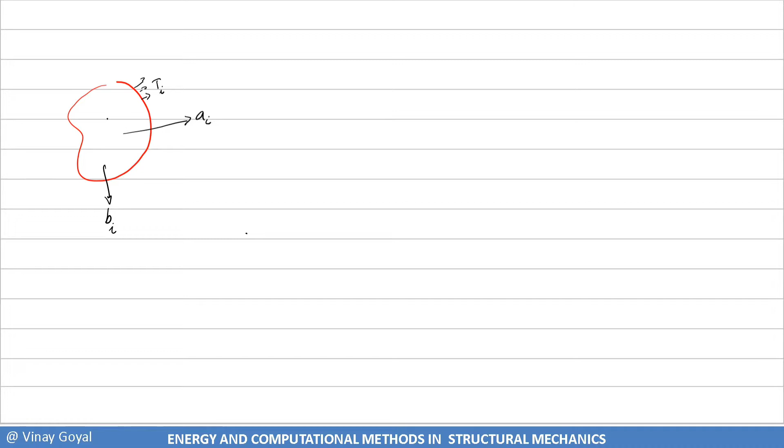But the next question is, what is next? That's where we want to go. So let's consider a body of material B. This body of material B is subject to body force Bi, traction loads Ti, and acceleration Ai, and it is reacted by the stresses at this point, which are sigma ij.

What we learned is that the system is in equilibrium on a volume element in the undeformed body, even though the stresses in the undeformed body vanish for this natural state. So I could state then that sigma ij, comma j, plus bi equals rho ai, and if there's no acceleration, this is equal to 0, in the volume V.

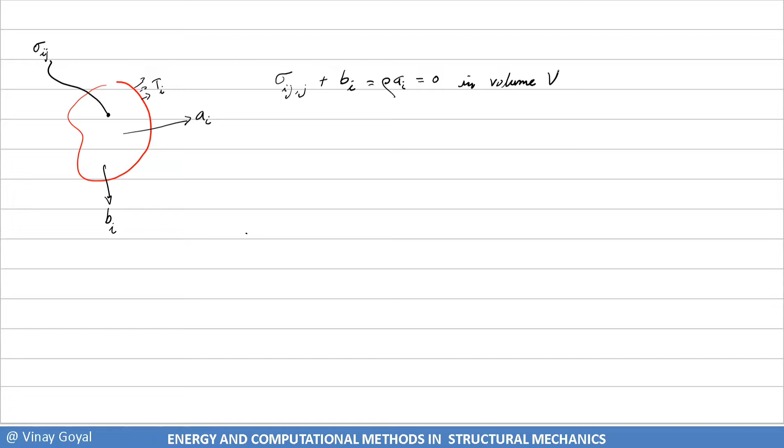Furthermore, what we want to do next is consider this body of material, and I'm going to consider an infinitesimal change in the deflection of the particle, assuming it changed an amount delta. In other words, say I have a body of material that's fixed here, I'm going to state that the body is going to change shape to a different shape.

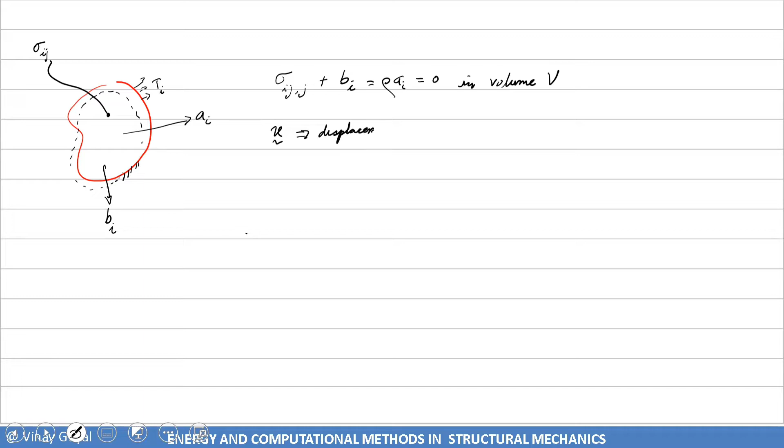I'm going to say that every point in the body moved an amount. If we call Ui the U vector deflections, displacements at every point, I'm going to state that every point is getting moved now. Like this point could have moved to this point. So every point in the body is moving some amount, and we're going to consider that change to be infinitesimal and virtual. It's a fake change.

So we'll consider then an infinitesimal change in the displacement of the particle originally at coordinates xj. In other words, this particle here moved to this point here. So P moved to P prime. That's what I'm looking at here.

We're going to say that infinitesimal change in displacement, which is virtual, that change in deflection, we'll denote as del Ui at xj, at that location in place. So we're calling this function then a virtual displacement function.

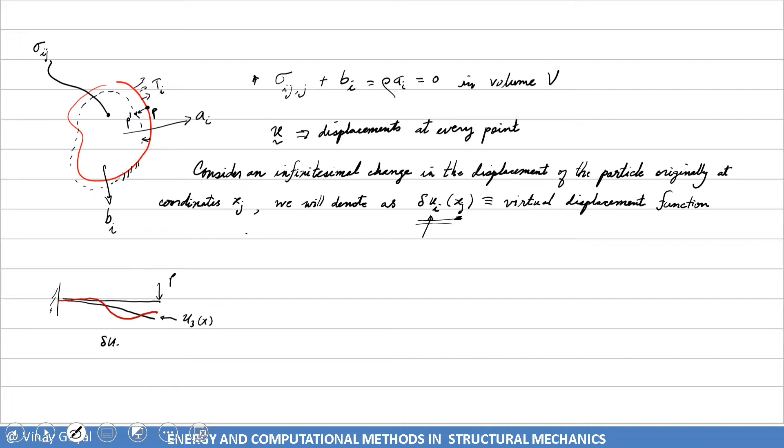So that's a real solution. And if I were to consider a virtual solution to the problem, so I'm looking at this instead now, remember what this means: del U3 of X1 -- if this is X1 this way -- corresponds to the change in height, deflection, between the virtual solution, shown in red, U3 tilde of X1. So that's the change in height, keeping X1 fixed.

Very similar in a 3D body, we keep X fixed, but then U is being changed from the real solution to the virtual solution. And so then I can consider the actual virtual work done by this change in deflection, which is virtual.

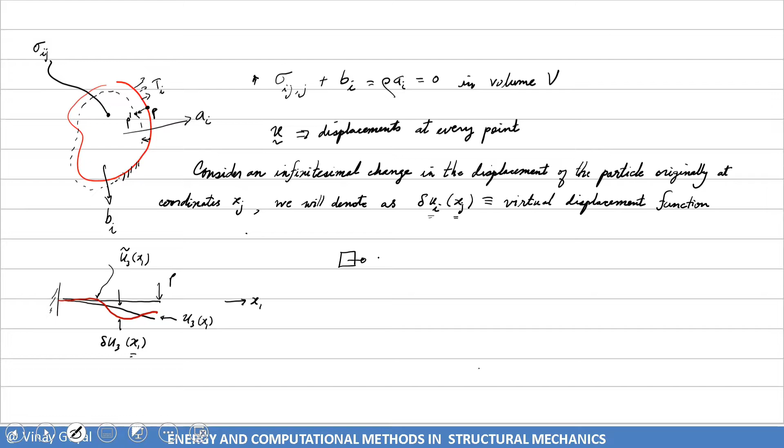So if you remember from physics, if I were to have a block of material and I moved it some amount by a force F, and it moved an amount D, the work done is F times D.

Very similarly here, what we're considering is the virtual work done, because the work is not real. If the change in displacements are virtual, then the virtual displacements cause a virtual work done. So the incremental work done

due to the forces acting on the body are given by del W. This is the triple integral over the volume, with the body force BI, that force moving through the virtual deflections, so I write del UI, del UI dV, because the body forces act over the volume.

Plus the double integral of the tractions which are acting on the surface. You can see tractions are acting on the surface, let's call that surface S. I'll call this Ti, whose normal is acting on a surface whose normal is N. And that's moving through del UI. That's how I get the

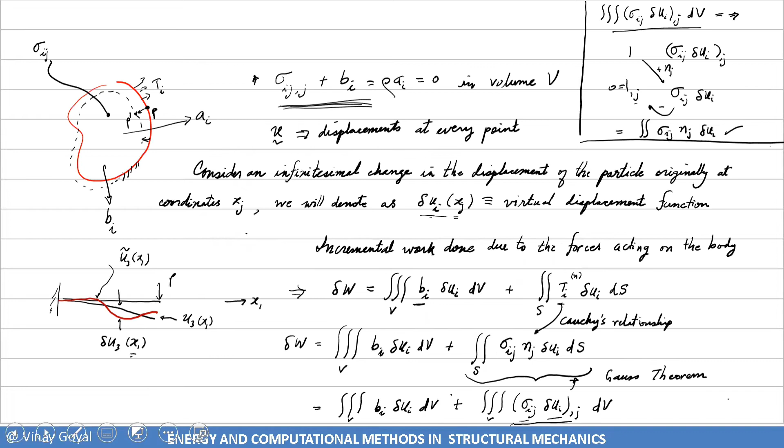The triple integral is sigma ij times del epsilon ij dv. And what this is telling us is something very powerful. We started with the external work done due to these fake changes in deflections, from the undeformed state to the deformed state.

And then we walked it through Cauchy's relationship to convert into a volume integral. Then we applied Gauss theorem. And after that, we end up finding that when we relate this external virtual work done, it's also related somehow to the internal stresses, which are reacting to external loads, moving now through the virtual strains. So these are clearly energetically conjugate.

They're conjugate to each other, energetically conjugate, and they belong to each other, which means there must be a way to relate sigma ij to epsilon ij. And so that is the subject of today's lecture, to relate sigma ij to epsilon ij, because they must be related, and they're related through the constitutive law, which is a material property you can determine through material measurements.

So let's examine the virtual work. The work done by these virtual displacements is virtual, it's not real. And what we demonstrated in this particular derivation is that the stress, the Cauchy stress, this right here is called the Cauchy stress, is energetically conjugate and is married to this infinitesimal strain.

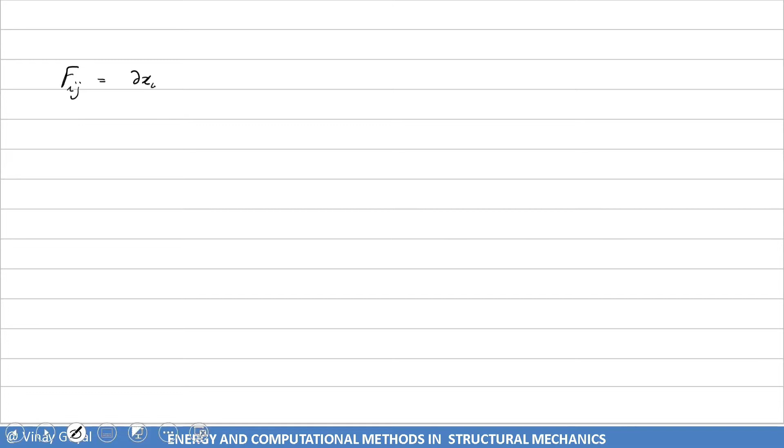Remember that the deformation gradient is the derivative of the coordinates of the deformed body with respect to the undeformed body. So that's the first step. I want to get there doing this.

The second step is that this is equal, if you recall, xi is ui plus xi - so the displacement plus the coordinate xi. Then partial against xj. What I'm going to do now is take that derivative: partial of ui with respect to xj plus del ij. And so that's a good start.

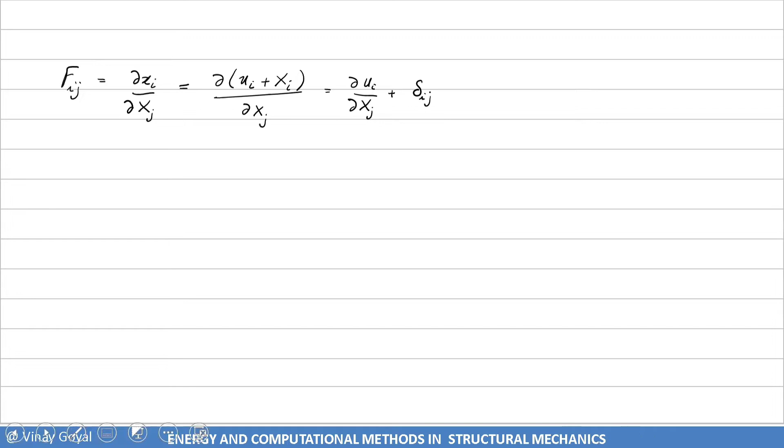And we've already made progress. So the next step, notice what I want to do - I want to show you where we were. This is what we had earlier, right here. And what I want to do is get to this state: I want to convert this del epsilon ij to the Green-Lagrange strain tensor, because that was defined on the undeformed body of material.

So to get there, very slowly, I need to start looking at the procedure. To do that, I need to take the first variation of Fij, and when I do that I have to take the derivative of Fij with respect to - and I'm going to change the variables, so instead of i and j, I'll use the derivative with respect to ua,b, because when I look at Fij, it only depends on derivatives.

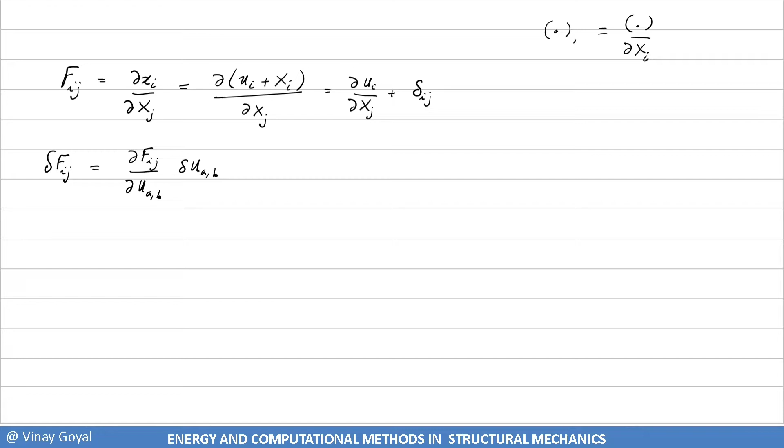So then I'll take that derivative instead, del u a,b. Here I'm using comma - that derivative is taken with respect to the undeformed configuration. I'm changing the notation a little bit because it will be easier for us moving forward. So continuing on, x here is the undeformed configuration, and the small x is the deformed configuration.

Very good, so we're getting there. Now when I look at that derivative, we only have this derivative with respect to this one right here, and that's all that is. I apologize for that - this derivative here, we want to take this derivative here. So all we have to do then is proceed forward with that derivation.

So then we have del AI, and then we have del JB. You can see that because this right here, if I define this quantity, then I can call this UI,comma J. Now earlier I was using UI,comma J with respect to the deformed configuration, so I want you to be careful here - I've changed the convention a little bit just so we can move forward a little bit quicker. So the derivative of this is going to give you that clearly, and then you have del U, okay, U,A,comma,B. So that's good progress right there.

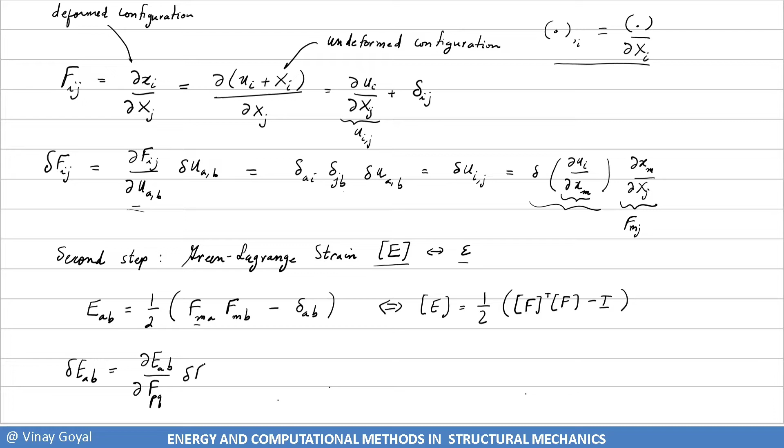So I want to basically use different variables that have not been used: P, Q. And so there's a variation - this is times the variation of FPQ. So I'm going to expand on that. My goal again is to try to figure out a way of relating these two quantities here.

The green Lagrange strain and infinitesimal strains. Infinitesimal strains are defined on the deformed configuration. The green Lagrange strain is defined in the undeformed configuration. When you're modeling biological tissues or large deformations like polymer behaviors, you definitely want to be working with large deformations. That's typically what is done.

And you may have seen in some of the problems that in the latest problem that we solved, it was the heart, and we're trying to model the heart with large deformations. And so that's why I had you guys look at green Lagrange strain, not the infinitesimal strain, because you need to really understand these large deformations really well to be able to model bodies of materials that exhibit large deformation, such as tissue behavior and membranes.

So here I have to expand on this, just reminding you of the motivation, because some of you may not understand why we're doing it. And so I really want you to pay attention to what's going on here.

So this 1/2 times the derivative of this quantity with respect to FPQ, that should be relatively easy. You've seen it done. We have to use the Kronecker delta, so you get del MP, del AQ, and all I've done is taken this derivative right there. So we have times FMB, okay? And then we have the product rule, which is what we're using, plus FMA, Kronecker delta MP, and Kronecker delta again, BQ.

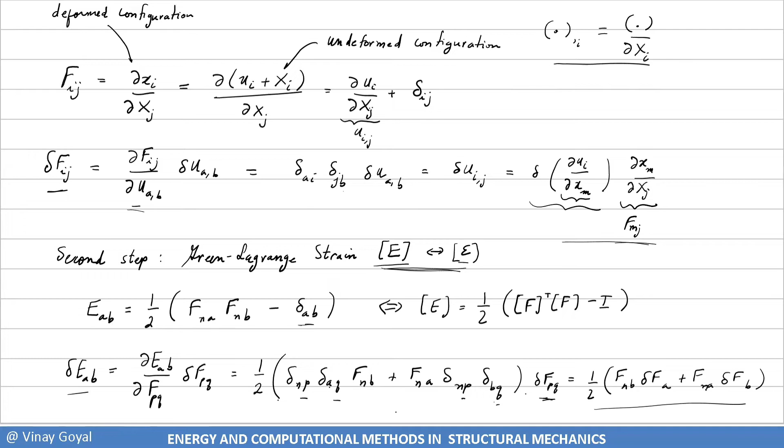In the next page, all these are N's, and N is repeated, so we want to be careful. Here again I'll use N just so we're careful, and since I already used M over here, that's a repeated index.

So the del of NA, what I'm going to do is use this formula here to substitute it: del FNA. So let's start with that. So that's F, substituting this for that, and then in that parenthesis what we want to put is that second index there, A.

And this index is repeated, so let's use that M again, that's fine, we can use that. Del derivative of U, and then the I instead of I is N, with respect to small xm. So far so good.

So I've replaced this with this, and I changed indices to be consistent with the formula that I have, plus FNA. And now again substitute this for whatever I have. So that's F, and notice how again I have to use the index B here, and I can use M again, that's fine. And then del partial of U, but now is N again, with respect to XM.

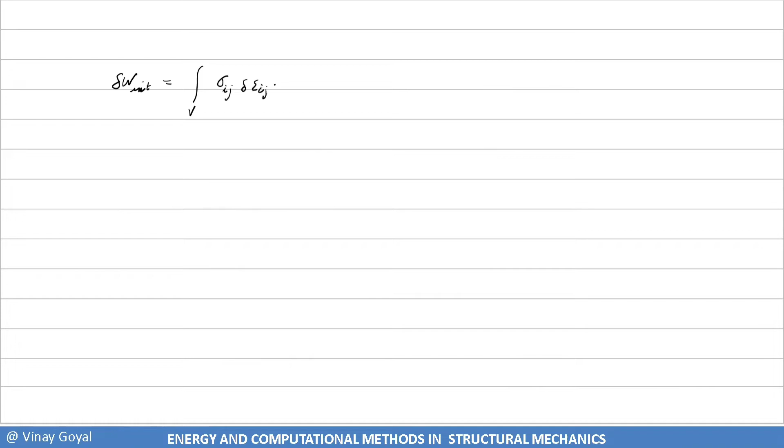So we'll go to the next page and bring everything together. The internal virtual work was shown to be the integral over the volume of sigma ij del epsilon ij dV. I want to write this on the undeformed configuration, so that's the integral over V. Now what I'm going to do is switch the variable so that I can match it with what I have on the previous page. I can use those indices directly. So this is the same as that, it doesn't change.

And then I'll substitute all the elements from the previous page. Sigma AB I'll leave alone, and then del epsilon AB I've already found fully. In fact, I should use MN, because that's what I used on the previous page, not AB. Let me do that. Now it's plug and play: I can plug in del epsilon MN from the previous page, F inverse MB, F inverse NA, and then del EAB. Now I have the deformation gradient, the determinant of that, which is J, and dV naught. Notice how the integral is now over the undeformed volume, which is very convenient. You can do the calculations there now.

So now I'm going to rearrange terms. I'll bring the J ahead and write it like this. Continuing, I can just rearrange all the terms: F inverse MB del EAB F inverse NA, and then dV naught. That is how I found the relationship from the deformed configuration to the undeformed configuration. And so now what I can do is figure out...

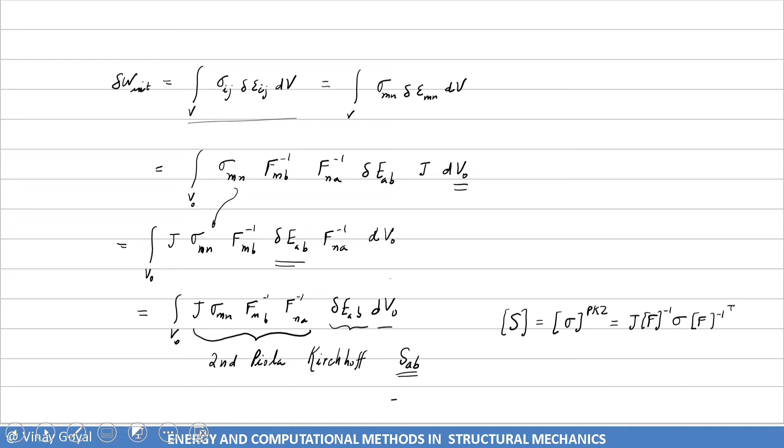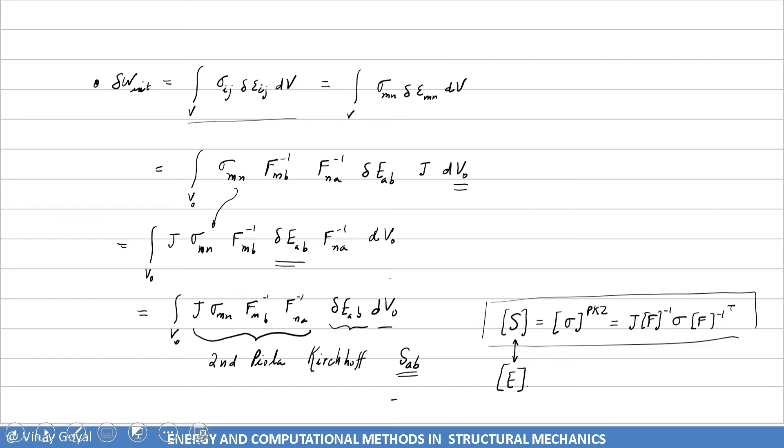This is the formula for second Piola-Kirchhoff stress, which is energetically conjugate to the Green-Lagrange strain. Both formulas are for finite deformation, but one is defined in the deformed configuration and the other in the undeformed configuration. Sometimes it's easier to do calculations in the undeformed configuration. The physical meaning of the second Piola-Kirchhoff stress isn't always clear, but it's convenient because it's symmetric.

The advantage of using the second Piola-Kirchhoff stress is that it's energetically conjugate to the Green-Lagrange strain, and it's parameterized by material coordinates only—derivatives are taken with respect to the undeformed configuration X. It can be interpreted as taking the force vector in the current configuration and relocating that corresponding vector in the undeformed configuration. This stress tensor is a kind of fictitious force divided by the corresponding area in the reference configuration, but it has value because it's symmetric and energetically conjugate. It's also simple to calculate: if I know F, I can do this calculation straightforwardly.

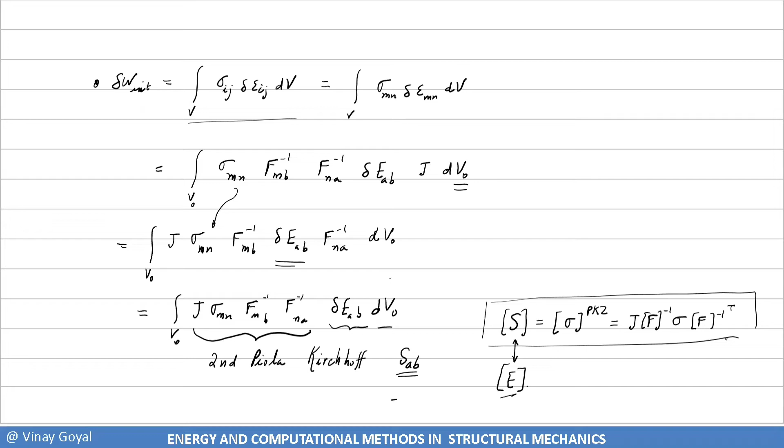With that said, we'll continue with the constitutive relationships. Today's lecture is really about constitutive law, and that long introduction was to demonstrate that stresses are related to strains, and that we should consider a way to figure that out.

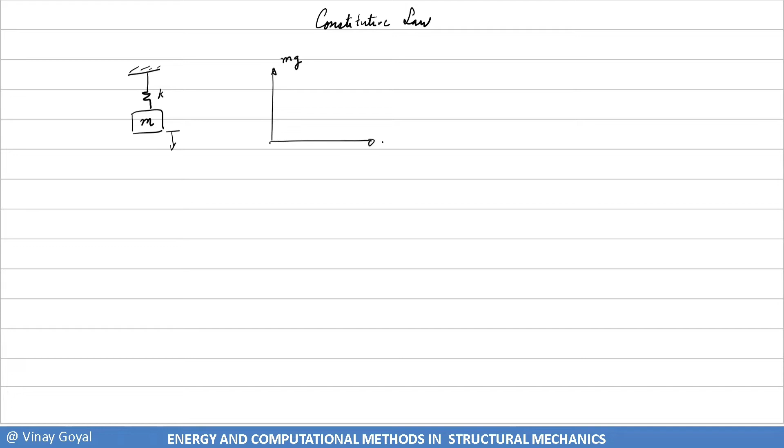If I went to the lab and had a spring and a mass M, that mass would cause the spring to stretch a certain amount. You can measure the weight and the deflection in the lab, and that gives you a stiffness. This stiffness provides resistance to deformation, and we know that if you change the mass in different ways, the deflection will change.

Hooke, in 1678, looked at the idea of testing multiple rods with different thicknesses, different diameters—so many different cross-sectional areas. It was found that for the same material, if I measure the deflection when a load P is applied at the end, that deflection depends upon the cross-sectional area. So if the cross-sectional area was A1 or A2, the deflection would also change.

It was also found that if the length of the rod was changed, the deflection also changes. So you get different final lengths, L1, L2, and different stiffnesses.

What was found is that if I normalize by taking P and dividing by area for the same rod and for different rods of the same material, then took the change in length delta—final length minus initial length divided by initial length—and tested multiple rods with different cross-sectional areas and multiple lengths, all the lines landed in one place with a common stiffness, a common slope, which they called the modulus.

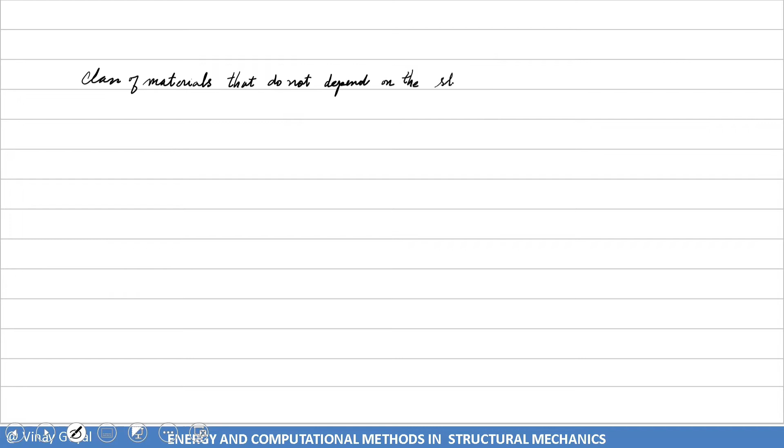Let's look at a class of materials that do not depend on the strain history. To tackle that, we'll say that in these cases, the body behaves elastically. In other words, I apply loading to the structure, and when I remove the loading, the body returns back to its original state—it's fully reversible, so it's fully elastic.

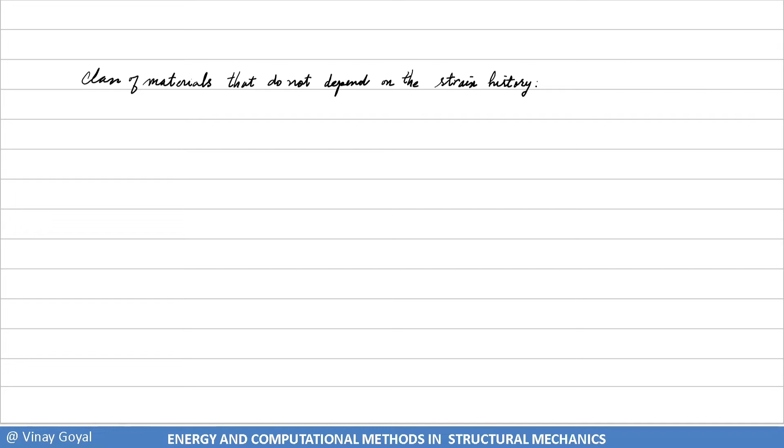In other words, if I had a little bar and I applied a load P, it will deform like this, that much, say.

But now I remove the load—this is undeformed, this is deformed—and now I remove the load, and it goes back to the original state. So remove the load, and it goes back to the original state.

We call this an elastic, reversible, elastic material, meaning it is reversible, okay?

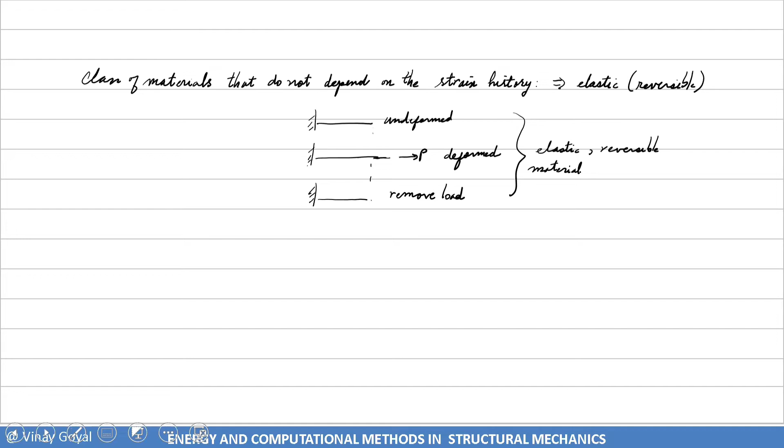And so let's define the existence of a strain energy function. Define the existence of a strain energy function. So if I define the existence of a strain energy function, W, then if the strain energy function does exist, we can say that stress equals dW/d epsilon.

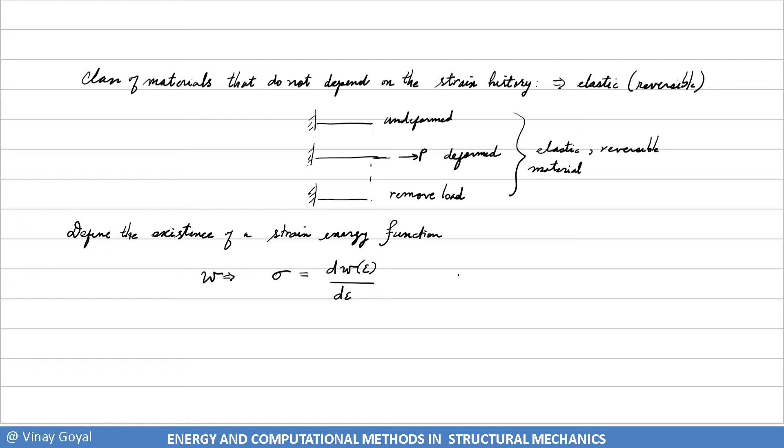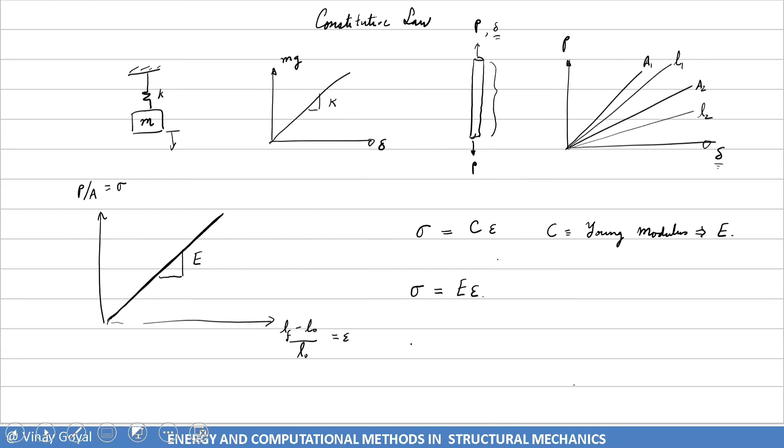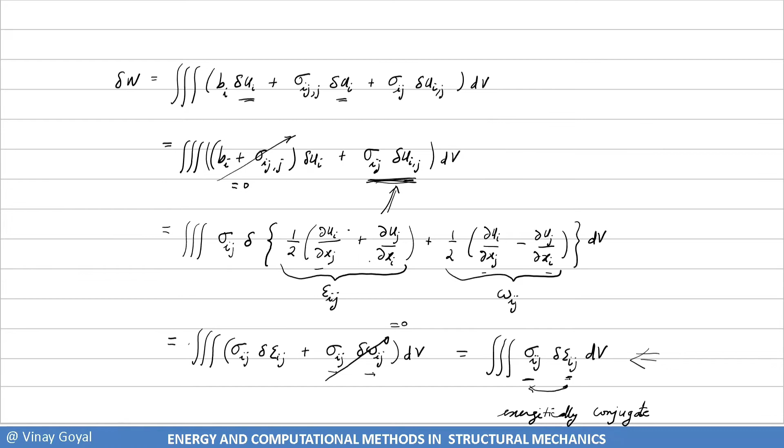And so when I look at that, I get this stress-strain curve, say. I know that stress is related to strain because we showed that they must be related through this relationship. We also showed that the virtual work done by the external loads relates stress to strain in some way, and that stress and strain are married in this way.

So we invoke that independence, path independence. In other words, if I load the structure, it will unload back in the same way. So there's no plastic deformation. It's fully reversible, and there's no hysteresis.

Notice how the work done is only a function of the difference in strain energy between two states, this point and this point. So in a closed loop, the work done over the path is 0. If I were to find the work done by going up and then going down, the work done is 0. This means that if the material is reversible, it implies path independence.

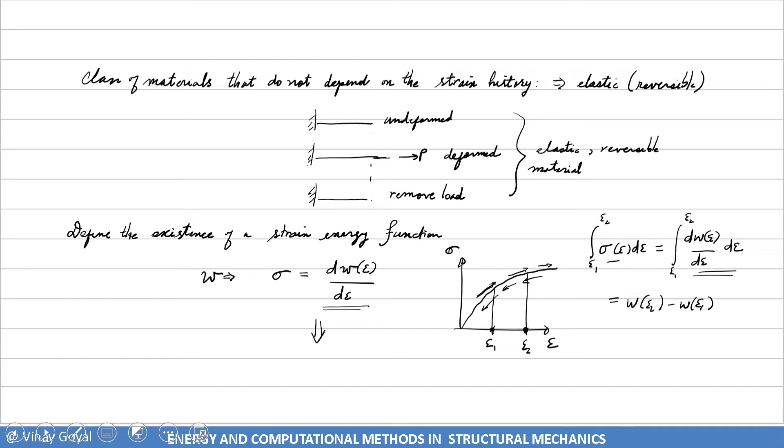And so in 3D theory, I can further expand this. In 3D theory, I have 6 components of stress, so the strain energy functional has to be a function of epsilon 11, epsilon 22, epsilon 33, epsilon 12, epsilon 13, epsilon 23—with respect to epsilon ij. So I must have a way of relating sigma ij to the strains through this functional relationship, and that will allow us to move forward.

Now notice how this is a second order tensor. That's a second order tensor. In this case, if a strain energy functional exists, then what we're saying is that the material is elastic. In other words, I apply a load, and when I remove it, it returns to the original state. And how do you find this relationship, how we determine the relationship between stress and strain? We determine that using the idea of material characterization. That's how we will do that.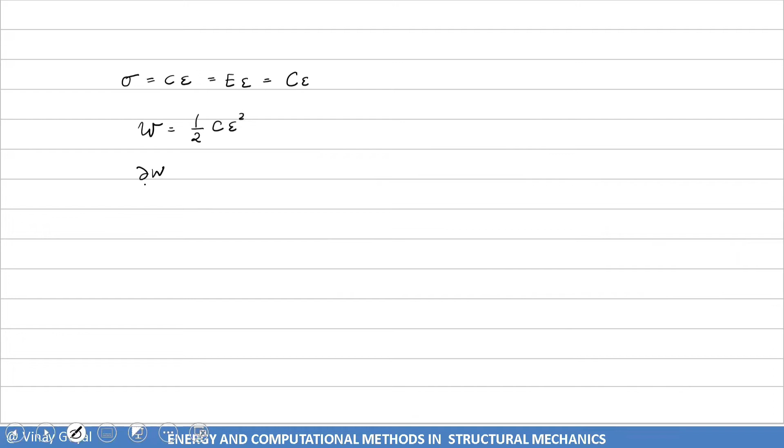So for the one-dimensional case, which is this one right here, let's look at what W will look like. We know for linear materials, stress equals C epsilon—we showed that through Hooke's law, or E times epsilon, but we're going to use C times epsilon for generality for now. So the strain energy function W must be 1/2 C epsilon squared. When you take the derivative of W with respect to strain, you get twice times 1/2 C epsilon, which is C epsilon—that's exactly stress. So this works, and the energy functional for a one-dimensional problem will look like that.

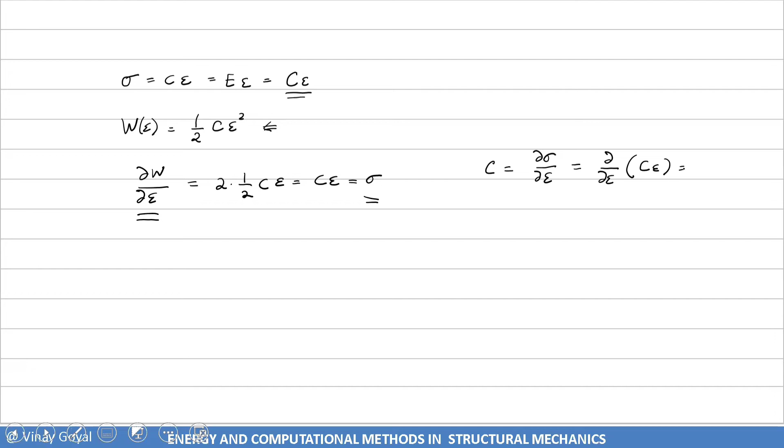Very similarly, we can generalize and see what it will look like for 3 dimensions. For 3 dimensions—in 1 dimension, clearly the slope E or C is the derivative of sigma with respect to epsilon, and you can see here that the derivative of sigma with respect to epsilon works because sigma is C times epsilon, and here clearly that's just C. So this relationship works for 1D.

So if I have a linear elastic material, then for a linear elastic material, I must have something equals the derivative of sigma ij with respect to—let's use Sij for stress—partial of Ekl. We can use kl. Sorry about that.

So therefore, if the slope for 1D is this one, then the slope for 3D is this one. And so I must have, since i, j, k, and l are 4 indices, a 4th order tensor that looks like this. In other words, I have 81 components of the 4th order tensor.

Notice how this is also equal to, and I can look at this carefully here, Sij, I already said that Sij is this expression right here, so that's the derivative of W with respect to epsilon, Eij. I'm going to use epsilon just for small deformation. I can use E for Green-Lagrange, which is for finite deformation. So what I get is this expression.

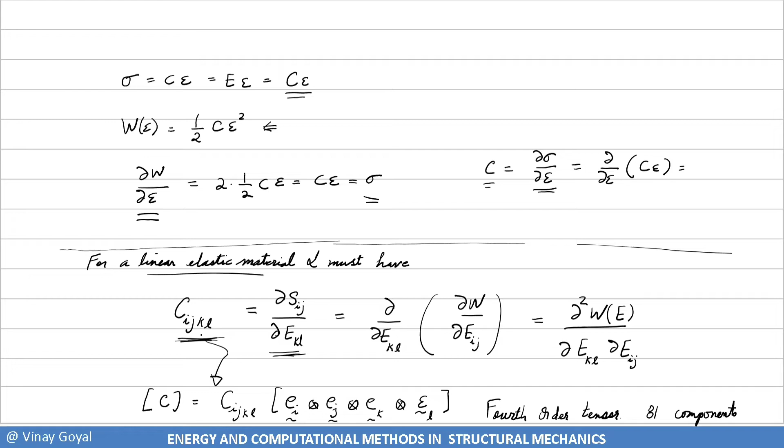So furthermore, we can define the fact that sigma, or stress, ij equals Cijkl EKL. And you can check that when I take the derivative of Sij with respect to EMN, I will in fact get Cijmn, which is what I've shown already here. So this relationship holds for linear elastic material.

There are 81 components here. And because the stress tensor is symmetric, Sji is also equal to Sij, which is also equal to Cijkl EKL. By swapping i and j, because i and j are symmetric, I have Cijkl EKL. In other words, Cijkl equals Cjikl, and that by itself brings me down to 54 independent components from 81.

And then I can do another one, which is that EKL is equal to ELK. So that gives me another way of further simplifying everything. So I can say then Sij equals Cijkl ELK, because I can swap K and L.

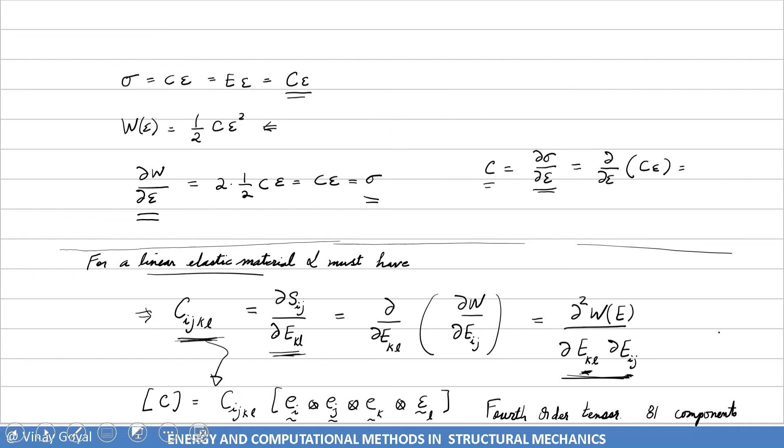And so now, because I have a conservative deformation process, I can further reduce everything more. That's because I can take this derivative two ways: taking this first and then this next, or this first and then taking that next. All that does then brings it to saying that Cijkl must be equal to CKLIJ, because it doesn't matter how I take the derivative.

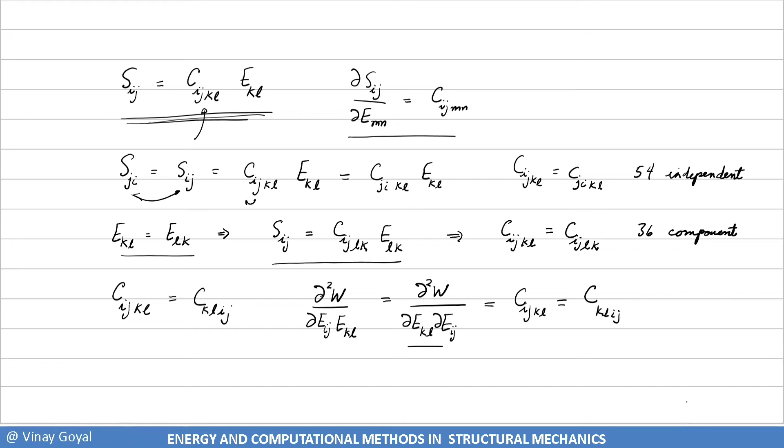I can do it this way or this way, and I should get the same answer, because I have a conservative deformation process. So I can have this situation, or the second way, which is KLIJ. And now that further reduces it from 81 components to 54 to 36 to now 21 independent constants, which can be measured in the labs.

So because of that, we have now really simplified the constitutive relationship quite a bit. Now I can say, okay, sigma ij equals Cijkl epsilon KL, or let's use big E for large deformation, which corresponds to the Piola-Kirchhoff stress. But in general, this is what I get. So here now, instead of 81 components, I have 21 independent components. Very important idea there that I think is worth thinking about.

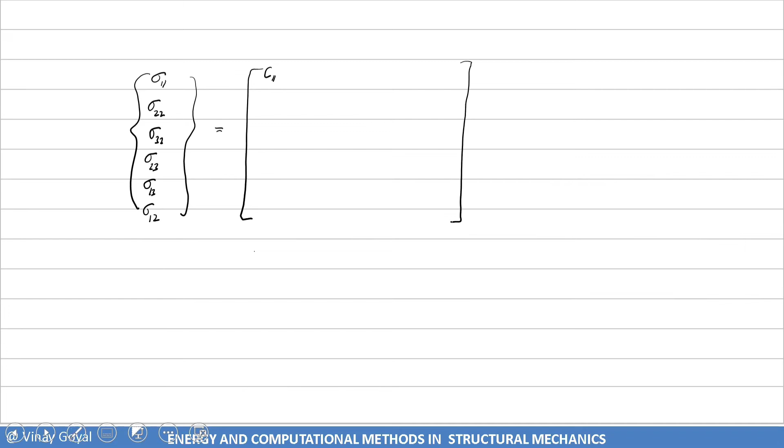And now I have C11, and then here I'm going to have a 6x6 that's symmetric, 36 components, but 21 independent because it's symmetric. So I'm basically independent. And you can see here that since this is symmetric...

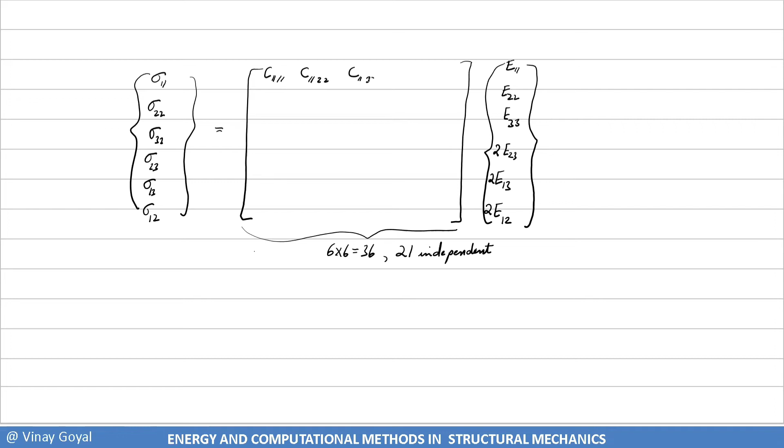Right? So under is expanding here. And you'll get that this is twice when you do it. And you get C1111, C1122, C1133, and so forth.

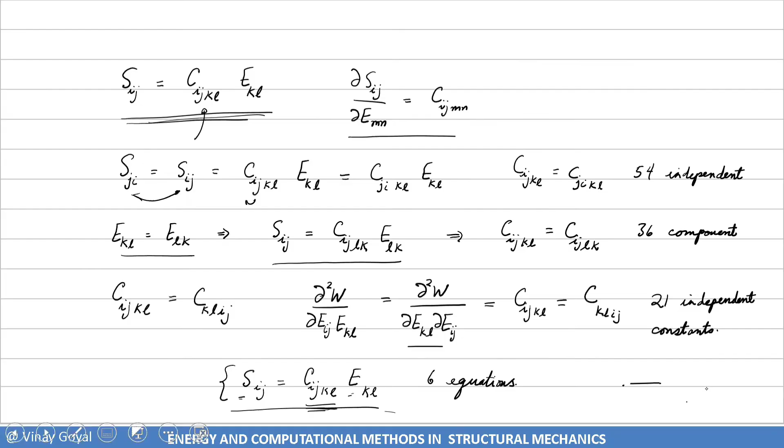So I'll invite you to expand. There should be 6 equations here. Expand it out and then write it in matrix format to fill the rest out, and you'll get a 6 by 6 here when you do that.

Some of the components will add up and you'll get 2 of them. Remember that these are the diagonal terms that cause stretching of the volume cube, and this one causes shearing or the angle change. And so here we have defined now the constitutive law for the most general formulation, which is 21 independent constants. These are fully anisotropic material.

And we really have not made any assumptions other than the fact that it's a linear material and that it is fully reversible as well. So very good. We've made great progress there, and we're able to understand what is going on with the most general form for a linear elastic material.

Now let's consider the idea that I may have an isotropic material. And for the isotropic material, I want to really define what that means. It just means that if I were to have a block and I cut samples, I will cut it this way randomly. Doesn't matter which way I cut rods out of this cube. If I test this material, I'll get the same properties, doesn't matter what direction. So a material is said to be isotropic if its properties do not depend upon certain preferential directions.

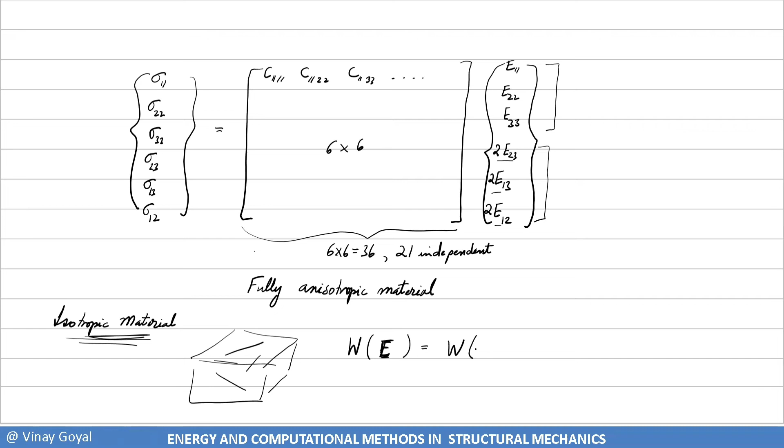In other words, if I have a strain energy function W, that W depends only on E bold, all the components of E, which there are 6 of them, equals W, and then it's going to be a function of the first invariant of E, second invariant of E, and third invariant of E. These are the most general cases.

This is not even linear elastic at this point. This is for isotropic material in the most general sense, and you will see this a lot in analyses of hyperelastic materials. And what I can do now is define what these functions are, and I will do that now. So we covered that already, but I think it's worth going through that again.

So the first invariant was covered, this one, which is the trace of E, and that's just adding up the diagonal terms of the strain tensor. The second invariant is this one, it's the trace of E squared, and that's simply EIJ EJI.

And we did this before, so it's not a problem, we're just trying to show you what we have. And then we have the third invariant of E, and that third invariant is EIJ, EJK, EKI. Okay? And so if I wanted to now calculate the stress based on this strain energy functional...

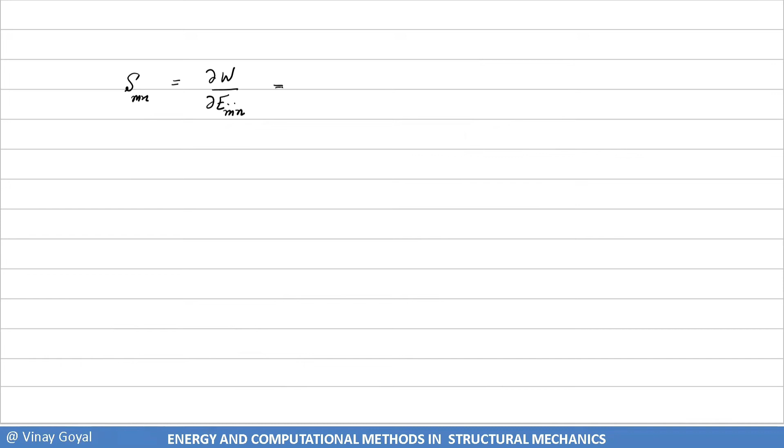And now I have to take the derivative of W with respect to F1, respect to EMN, plus derivative of W with respect to F2, derivative of F2 with respect to EMN, plus derivative of W with respect to F3, derivative of F3 with respect to EMN. That's what I get. And so we can now very quickly, what I do is chain rule there because W depends on F1, F2, and F3, but F1, F2, and F3 depend on these E's. So I'm just trying to quickly work through that.

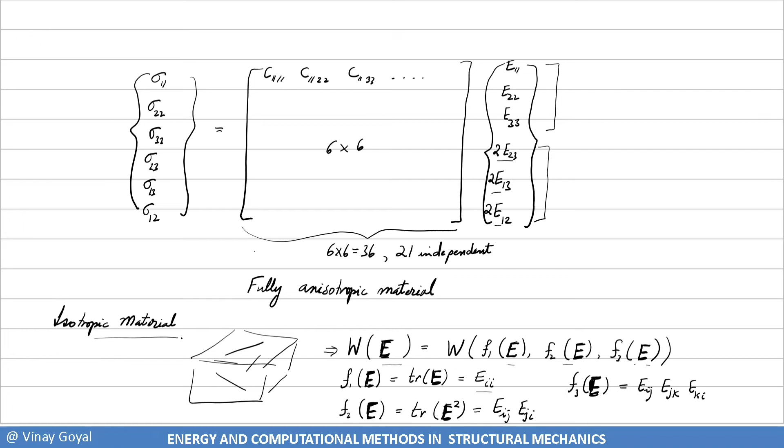For me to get the stress out of this most general term form for an isotropic material, this could be nonlinear behavior, but for the material to be isotropic, it does need to depend on these invariants so that it doesn't matter which way you look at the constitutive law. If you extract blocks of material out of a bigger block, it doesn't matter in which direction you test it, you can get the same answer, the same characterization. But this is the most general term. It's not even linear, this works for nonlinear hyperelastic materials. As long as it's dependent on these three strain invariants, then that's what we get.

So if I can find now these derivatives fairly quickly, let's walk it through. Derivative of F1 with respect to EMN - this is the derivative of EII with respect to EMN, because I'm looking at the first invariant here. And so that's going to be equal to Kronecker delta, del IM del IN. I cancel out, you get del MN. So I just get that expression.

If I look at the second invariant now, with respect to EMN, then I get the derivative of EIJ with respect to EMN, times EJI, plus EIJ times the derivative of EJI with respect to EMN. Then here that's Kronecker delta again, del IM del JN, and this is Kronecker delta again, del JM del IN. And so here I and J cancel out from these ones - you can work it through, and what you get at the end is twice EMN when you work it through. So it collapses to get 2 EMN.

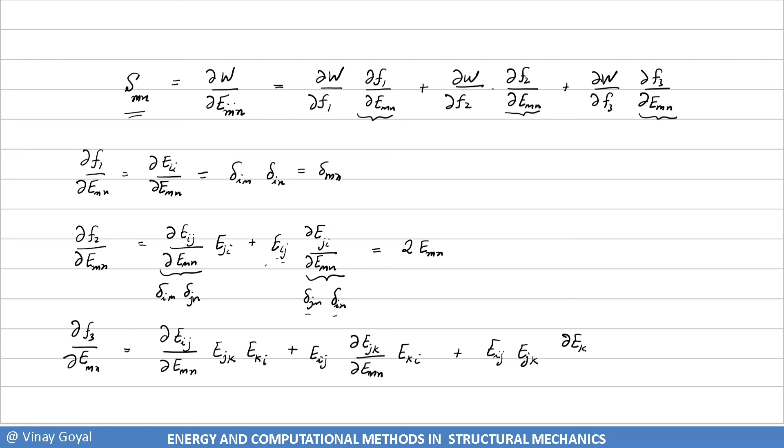And now I have the derivative of the third invariant, which is a little bit longer, but nothing to be fearful of. Derivative of EIJ respect to EMN times EJK EKI, plus the derivative of EI - then I have the first term, plus EIJ EJK times the derivative of EKI respect to EMN. Here that's Kronecker delta again, delta IM delta JN, that's Kronecker delta del JM del KN, Kronecker delta del KM del IN. And now you can collapse again, this J and I cancel out, you can bring it over there and so forth. And when you do that, you will get 3 ENK EKM.

Okay, so those are the three quantities you get, and notice how the stress now depends on this. So basically, let me write it out down here, the summary of that. SMN is equal to the derivative of W with respect to F1, times del MN, plus the derivative of W with respect to F2, times twice EMN, plus the derivative of W with respect to F3, times 3 times ENK EKM. You can see how SMN is a quadratic function, up to a quadratic function. For the material to be isotropic, this is what we get.

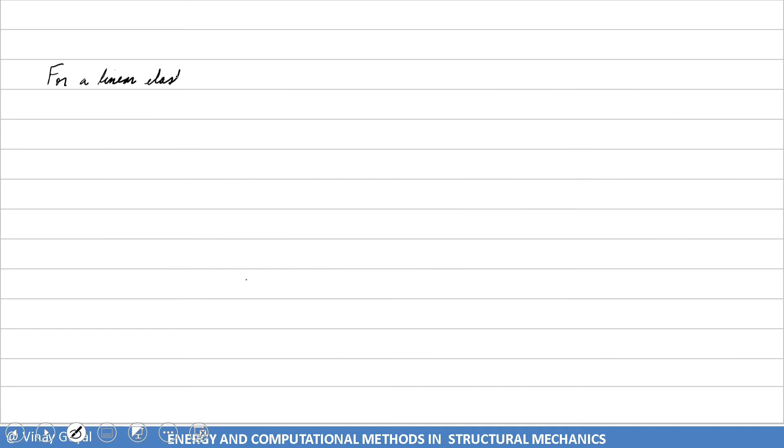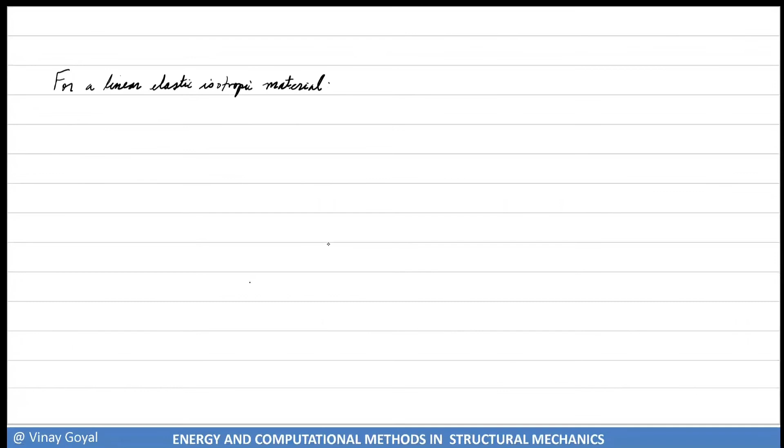So what if now I want to consider a linear elastic material? If I want to consider linear elastic material, then we should figure out how to get there. So what I want you to notice is that if I want to look at a linear elastic material, isotropic material, I want to more closely look at what I have here. So let's look at this for the most general case.

You can see that if I want a linear elastic material, clearly this is a function of this quadratically. So for linear elastic material, I don't want this term to show up. So I don't want W to depend on F3, because otherwise then SMN becomes a quadratic function of that. I want SMN to be linearly dependent on EMN, but you can see here that there's this function here.

So I need a constant there. I don't want W to depend on F2 in a way that doesn't work - I want W to depend on F2 in such a manner that I get a constant when I take this derivative, so that SMN is linearly dependent on EMN. Here, with respect to this one, this should not be just dependent on del MN, because that will not work out - it's just a constant. I need this to be linearly dependent on EMN somehow. So this should be a quadratic function - F1, W should depend on a quadratic function of F1, so that when I take that derivative, I'm able to get something to do with EMN.

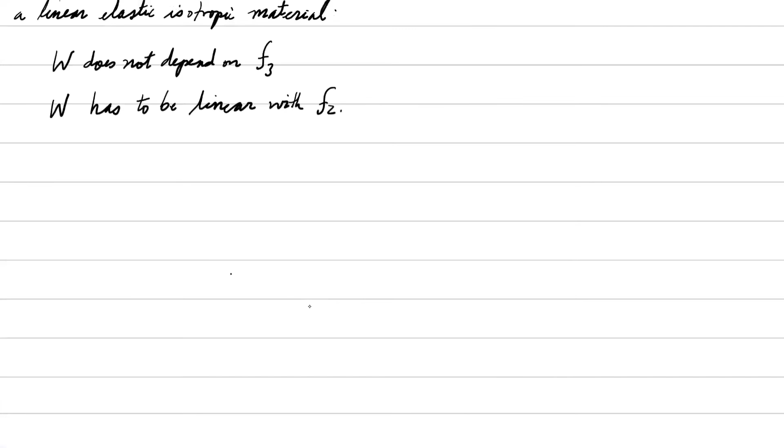So I need a linear elastic material, and that's what I want to come up with. So W does not depend on F3, clearly - otherwise then SMN becomes a quadratic constraint, and that's not linear. And then somehow S has to be linear, W has to be linear with F2, because I need, when I take that derivative, W with respect to F3 to be 0. I want this W with respect to F2 to give me a constant of some kind.

And I need that because it's already dependent linearly on EMN. So I don't want to have something here with EMN, otherwise it would be not very good.

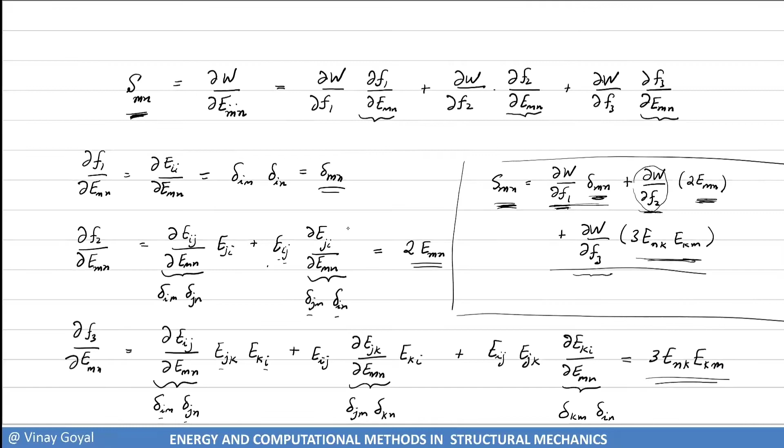Here, now though, F1, if you remember what F1 is, F1 was the trace.

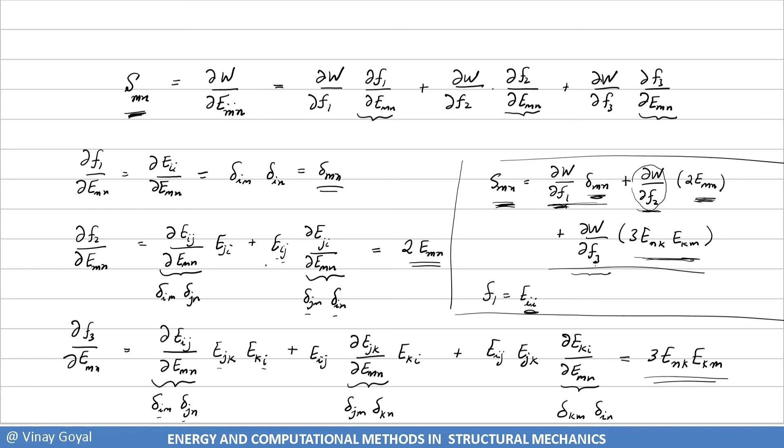So somehow I need this SMN to depend linearly on that. So therefore, W should be a function of F1 quadratically. So when I take the derivative, I get a linear function, which then will work out to be linear. So W has to be quadratic with F3, F1. So WF1 be proportional to the strains somehow.

And it has to be because this is a constant, del mn. So I need something to show up here that has E. Okay, so we need that for sure. I'm cleaning this up for posterity.

And so therefore, I'm going to say that for linear elastic isotropic material, W equals, these are the components of strain. I could have written it like this. I want this to be equal to a constant A1, F1 squared plus A2, F2. As I said, it was linear with F2, quadratic with F1. But it should not depend on F3 because we already showed you that I don't want S to have F3, otherwise it will not be linear.

And so I can now quickly take this derivative, right? So we have to take these derivatives here. This one's right here. So let's take the derivative S. I'm gonna go back again and repeat what I wrote here.

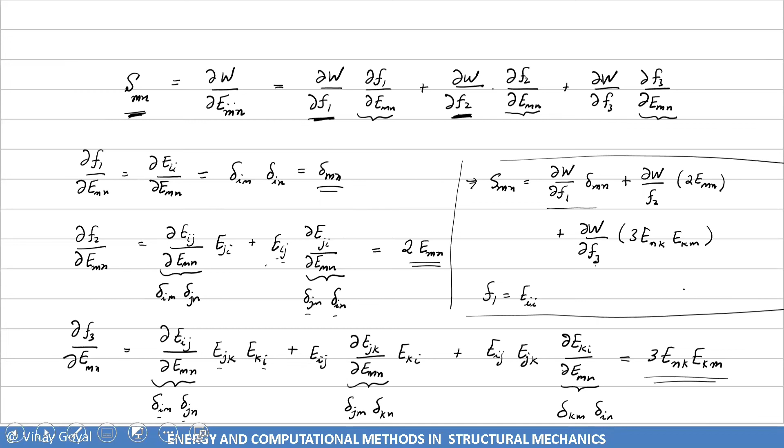Smn equals derivative of W with respect to F1 times del Mn, plus the derivative of W with respect to F2, and then that's twice EMN.

And when I now take that derivative, I get twice A1 F1, but I know what F1 is. F1 is the trace of E, and then plus the derivative of W with respect to F2, which just gives me A2. So A2 times the twice I have here, EMN. So I came up with a way of relating SMN to the strain, and you can see it is linear.

And we came up with the most general linear elastic constitutive relationship. Now, this 2A1 is typically called lambda. And this coefficient here is called mu. And those are called the Lamé parameters, and it's actually called Hooke's law.

So SMN is actually equal to lambda EII plus twice mu EMN. And this is the most general form of a linear isotropic material.

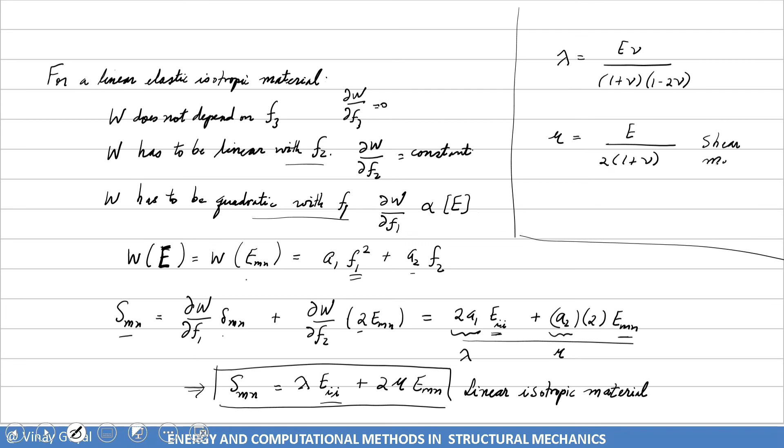There's a shear modulus here. Nu is a Poisson ratio, and E is the modulus.

And when you invert, if I want to invert this relationship, it's very easy. You simply write this in matrix format and then invert the matrix. And the inverse of this relationship, when you do it, is going to find epsilon ij to be equal to...

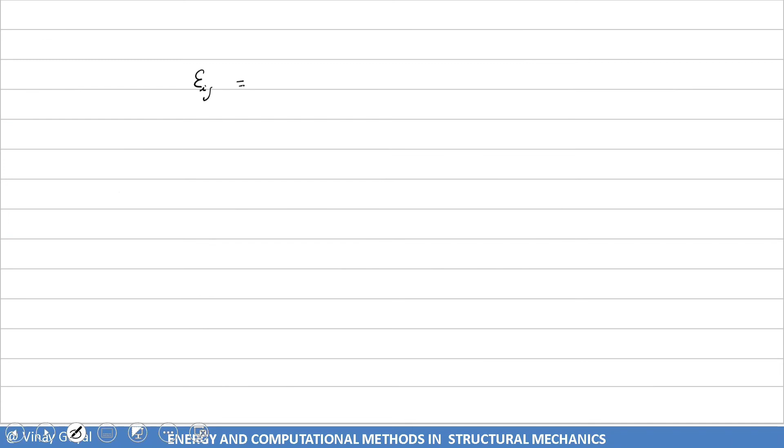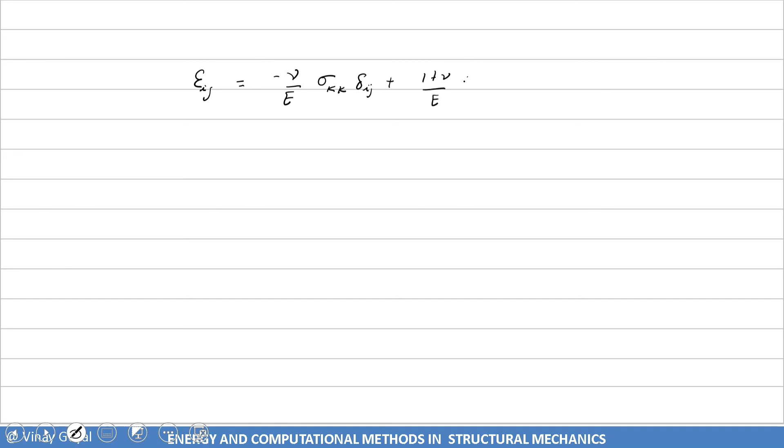minus nu over E, sigma kk, del ij, plus 1 plus nu divided by E, sigma ij. That's what you get when you do that.

Now, I did this through very rigorous mathematics. You can see that here, but I can get to the same answer doing physical experiments. I can get to the same answer using physical experiments. So let's conduct some physical experiments.

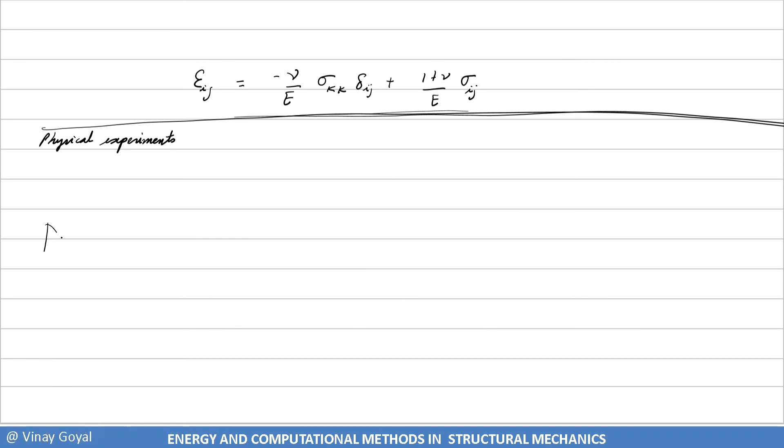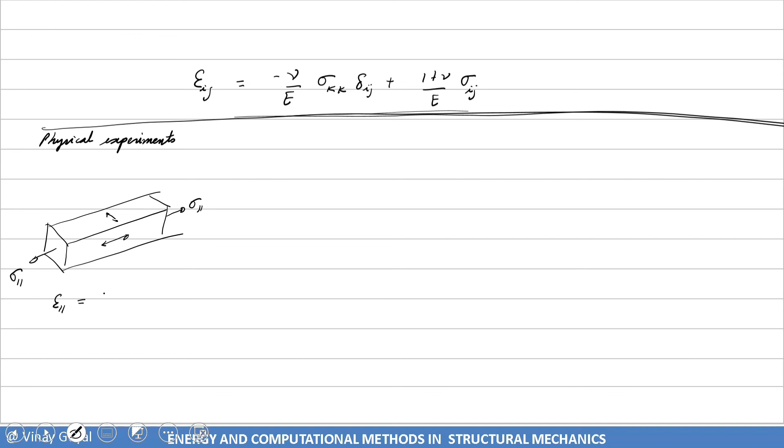What I'm going to do is apply a load here, a load there, and apply sigma 1,1. I want to measure the strain going this way and the strain going that way. I'll find that epsilon 1,1 equals sigma 1,1 divided by the modulus E. But if this is the 1 direction, that's the 2 direction, and that's the 3 direction, then epsilon 2,2 is going to be negative Poisson ratio times epsilon 1,1, because that's the definition of Poisson ratio.

So I get negative nu sigma 1,1 over E. And epsilon 3,3 likewise would be negative nu sigma 1,1 over E as well. So that's the first experiment.

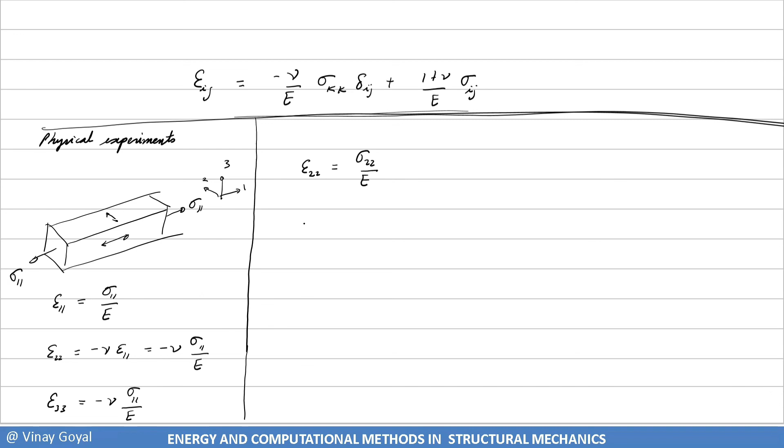I can now conduct a second experiment where I apply the loads, but now in the 2 direction instead of the 1 direction. When I do that, I'll get epsilon 2,2 equals sigma 2,2 divided by E, but epsilon 1,1 would be equal to the negative of nu sigma 2,2 divided by E, and epsilon 3,3 will be the negative of nu sigma 2,2 divided by E.

And I can then go ahead and continue. This is loading in the 1 direction, this is loading in the 2nd direction. And I get epsilon 3,3 now to be sigma 3,3 divided by E. And now the other directions, I get the Poisson ratio effects.

I can now apply the principle of superposition. And when I do that, what I'll get is that I can add the strains due to the load in the 1, 2, and 3 directions.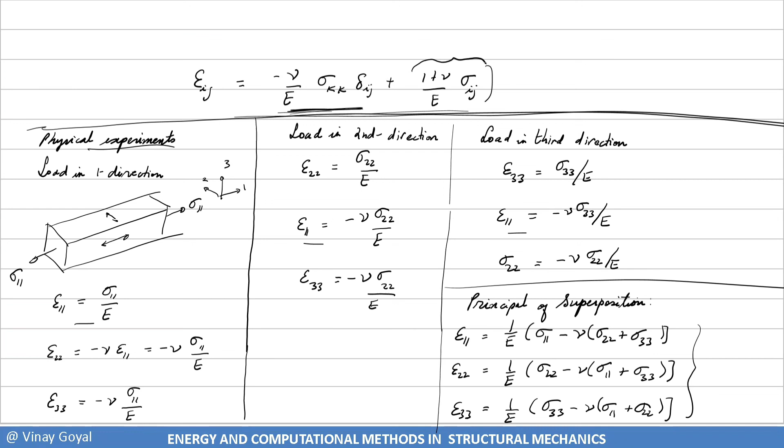Well, that's when I apply shear, which is actually even simpler. Shear loading will result, for isotropic materials, simply in twice epsilon 1,2 equals sigma 1,2 divided by G, the shear modulus. Then twice epsilon 1,3 equals sigma 1,3 divided by G, and twice epsilon 2,3 equals sigma 2,3 divided by G.

And this term shows up in that manner, while this term will be 0, because anytime I have epsilon 1,2, this term goes away due to the Kronecker delta. This stays, so I get exactly the relationship of shear strain to shear stress. So that's very good.

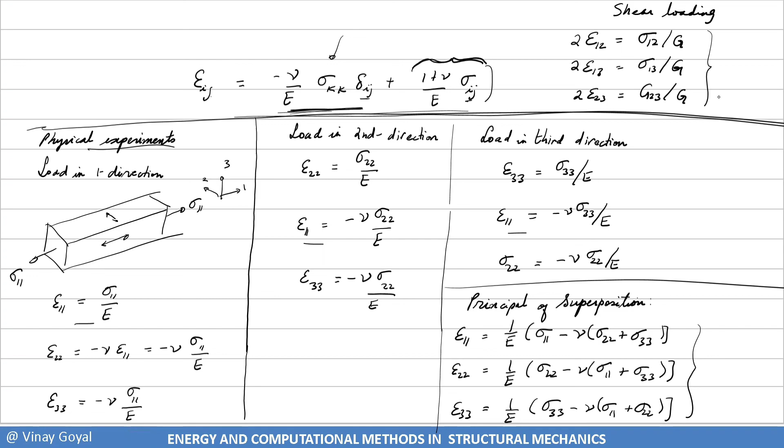When I go to a 3D orthotropic material, I can also apply the superposition principle, if the material directions were different, not isotropic. Meaning if I had a material where the loading this way was different from the loading that way, the modulus was different, and it was different in the thickness direction. If E11 was different from E22, was different from E33, then I can apply the same superposition, assuming the Poisson ratios would be different in every direction, and the shear modulus would be different in every direction.

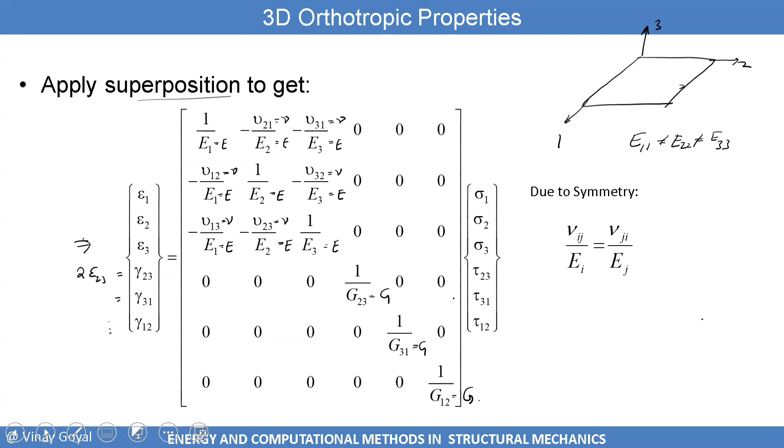That will match exactly what we had in the previous slide. Here I define gammas to be twice epsilon 2, 3, and so forth. I can invert this relationship and get a more complicated stress-strain relationship. When it's an orthotropic material, it's quite complicated. When it's an isotropic material, you get exactly what I showed you in the previous slide, but written in index notation. If I invert this relationship, I get exactly what I had just shown you, which simplifies to this very nice relationship.

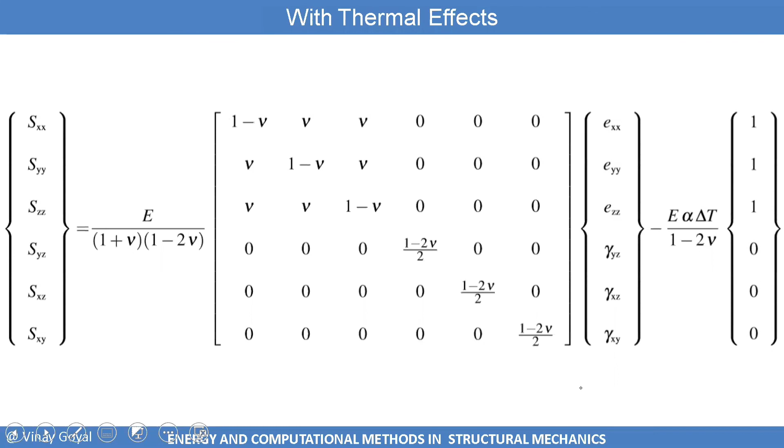With thermal effects, you can have thermal effects, but we won't go too deep here. I also want to point out, that's called a shear modulus.

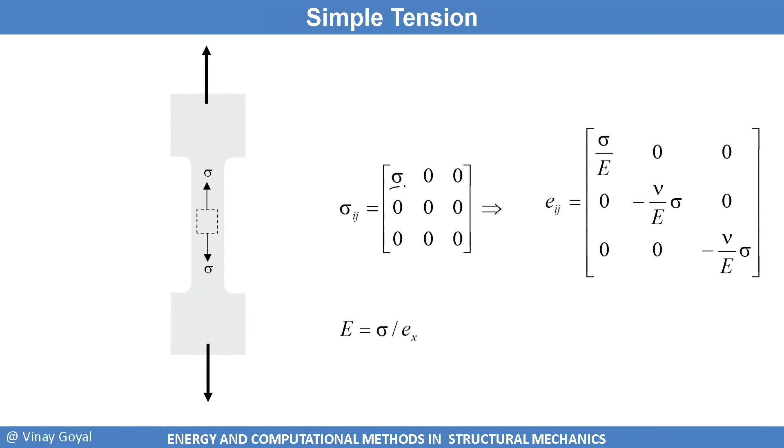You also have a simple tension case. For simple tension, you can see the strain you get due to a simple tension case, and that's what we used for our experiments earlier. In pure shear, only tau and tau show up here, and the strain becomes these quantities, because those are the only components that matter.

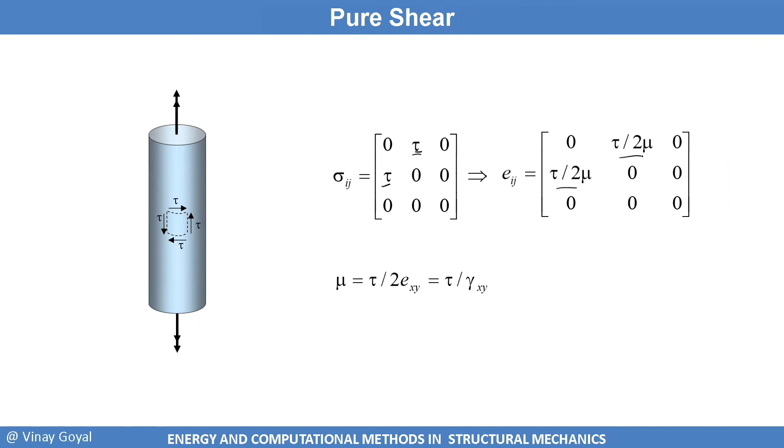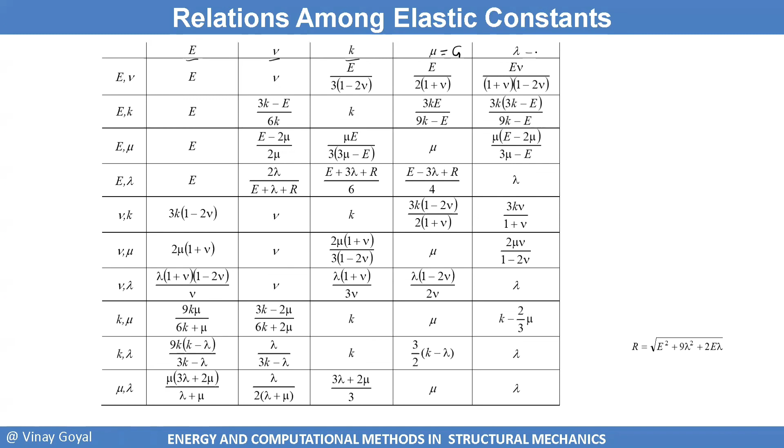You can also look at the relationships of the different parameters. Pause the video here and look at the relationships that exist between the bulk modulus, the Poisson ratio - you guys are familiar with this, but I'm just showing how they relate to each other. This is the shear modulus G I was using earlier, and this is one of the Lamé constants I discussed earlier. So all these relationships have been covered.

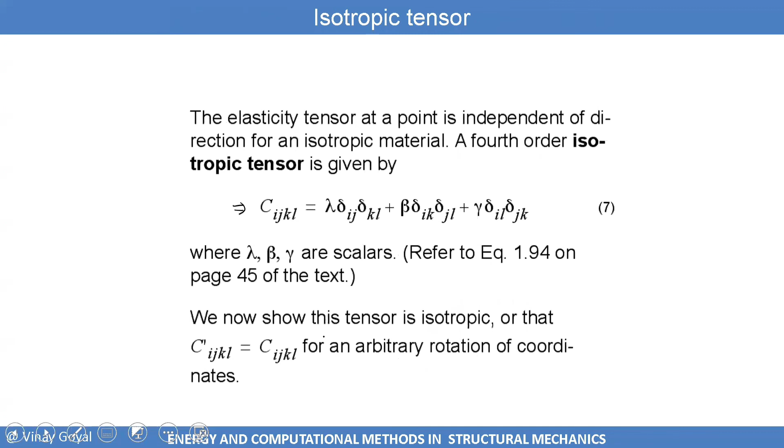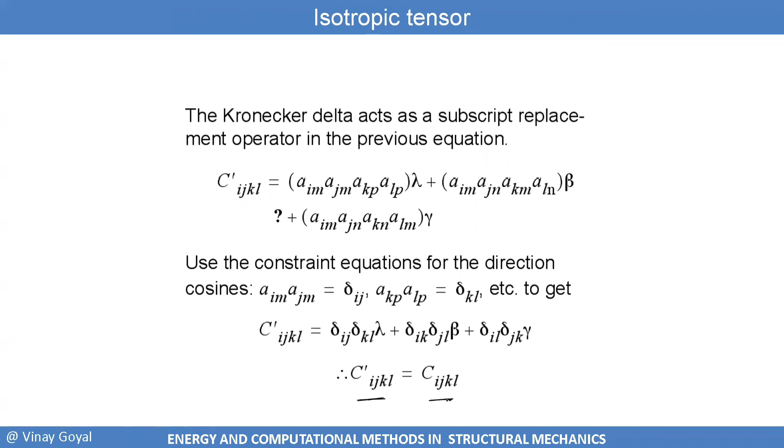You can do a transformation to that equation by simply doing an arbitrary transformation. By substituting this into this equation here, you can work it all out, and when you do, you'll find that C prime equals C. I invite you to pause the video and do it yourself at this point.

Continuing on with constitutive law, I want to bring to your attention that the strain energy functional is going to become important sometimes, and we'll be looking into that. The strain energy density may need to be calculated for some situations.

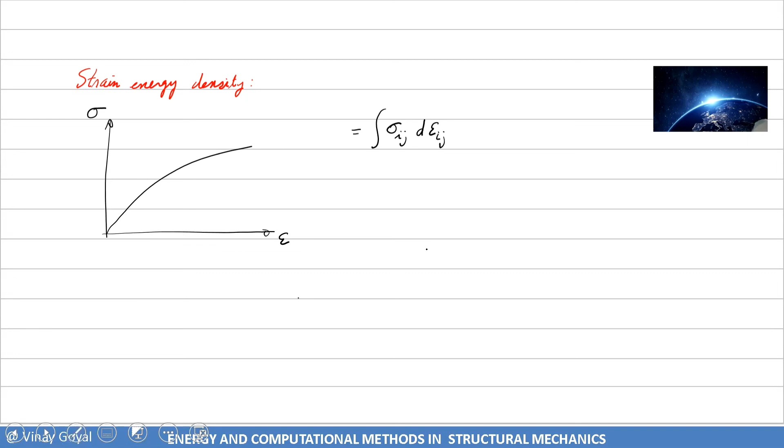To calculate strain energy density, all you have to do is look at the area under the stress-strain curve. That entails taking the integral of sigma ij d epsilon ij - that's the strain energy density. This is going to come up a few times, so it's very important to understand that it's the area under this curve.

For a linear elastic material, we can determine what that is by calculating U equals 1/2 Cijkl epsilon ij times epsilon kl. You may ask why that's the case.

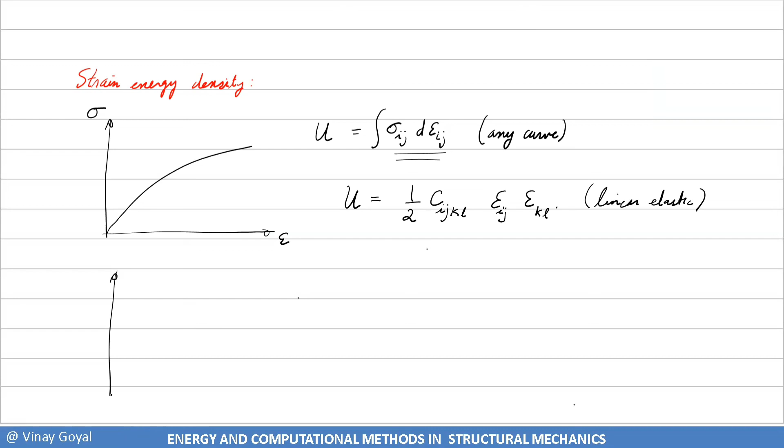If I look at the one-dimensional case - this is for any curve, and this is for linear elastic - the area under this curve for linear elastic is U equals 1/2 sigma epsilon, but that's for 1D. Since sigma equals C epsilon, times epsilon, that's 1/2 C epsilon squared. Analogously, for 3D, you're going to have 1/2 sigma ij epsilon ij, but sigma ij equals this times this, so that's why we get the expression you see here.

You can simply substitute this expression to get the strain energy density for a linear elastic material. With that said, today concludes this particular lecture. We'll pick it up with a new topic to try to summarize the equations that we have.